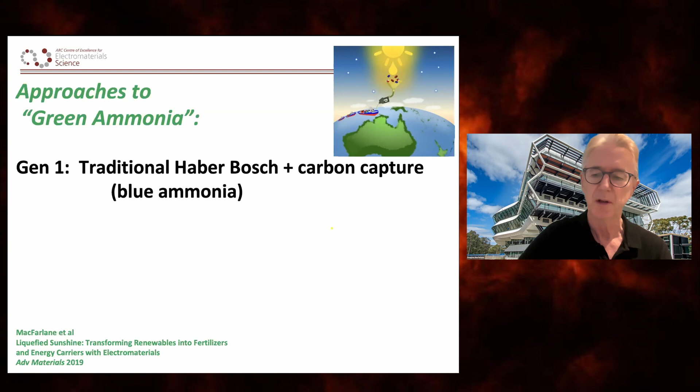Moving on from that, there's the prospect here we can use green hydrogen. If we have green hydrogen from electrolysis or some other process, we can put that into the Haber-Bosch process and generate ammonia. And then to put ammonia into some context as a liquid, as a fuel, let me tell you that it can be liquefied at 12 bar of pressure at 30 degrees C. So that's the kind of pressures and temperatures for LPG. So think of that kind of engineering, nothing terribly complex there.

And as that liquid form, it has an energy density of about half the megajoules per kilogram of gasoline. Okay, so it's not going to ever be a long-haul jet fuel because it's just not energy dense enough, but it in fact is being considered as a short-haul jet fuel. So it's energy dense enough to be a sensible fuel in its own right.

However, before the world got to that point, I've just given you the most up-to-date 2022 thinking there, but before we got there, there is clearly a role for ammonia as a hydrogen carrier. In other words, as I've just talked about, we can make ammonia from green hydrogen. Shipping of ammonia, this is why it became the focus of attention. Shipping and pipelining of ammonia is routine. There are several technologies around now to turn ammonia back into hydrogen, or crack it, as we say. And then, of course, the hydrogen is available.

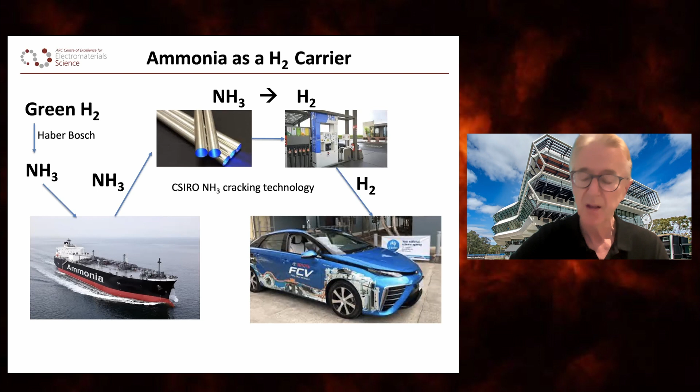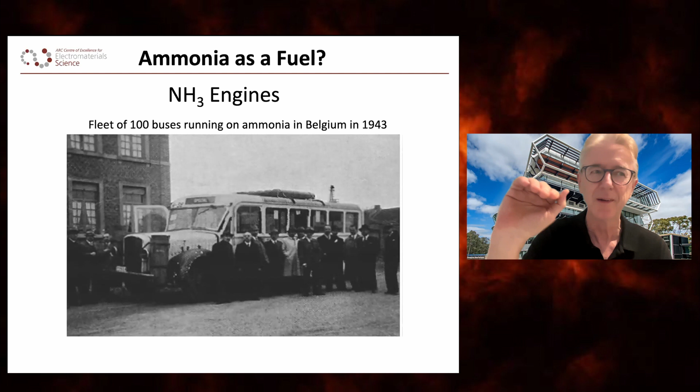However, that idea stimulated quite a lot of further discussion, and many of us were reminded that, in fact, not so very long ago, ammonia has been used as a fuel in ordinary engines. Think of ordinary diesel-type engines. As far back as Belgium in the Second World War, there was a fleet of buses running on ammonia, and you can see in this picture the cylinders of ammonia sitting on top of the bus. Okay, so ammonia used directly, no hydrogen in the rest of my story. Apologies to all the hydrogen people here. Ammonia directly as a fuel.

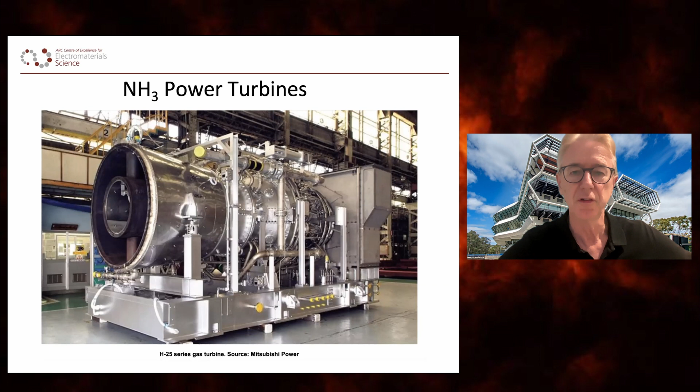Right up to date, here's an ammonia power turbine that is very similar to a natural gas turbine, tweaked, if you like, tuned to run on ammonia. That's not a major refit of that turbine. And this whole situation was considerably propelled by the International Maritime Organization mandating that the commercial shipping of the world should aim to be effectively carbon neutral by 2050.

And as the shipping companies and the ship builders of the world began to look around for what fuel was going to replace bunker fuel, the answer, really the only answer that was viable, was ammonia. And that has largely taken root as the main way forward for international shipping. And that is a huge amount of energy required for shipping, especially by 2050. So that's a quick little summary of how that's developing as an end of supply chain utilization of ammonia that might have started with green hydrogen as the thing stimulating the production of the ammonia.

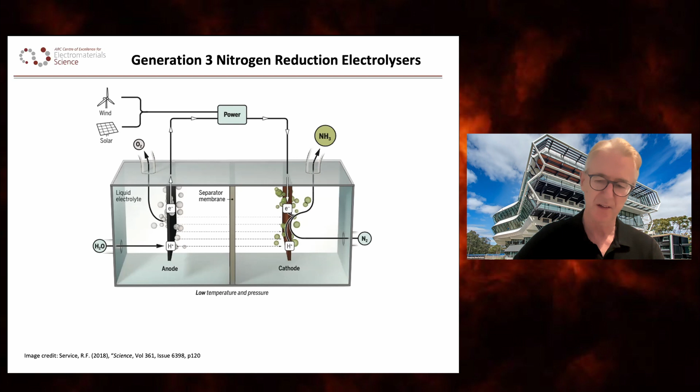But I want to then go on tonight and talk about, again, apologies to the hydrogen people here, can we effectively skip the hydrogen and go direct to ammonia from nitrogen? And the electrolysis approach to answering that question is relatively similar to the electrolysis that produces hydrogen. So to the extent that we're talking of electrolysis-type hydrogen, it can, in concept, be turned over into an ammonia producing process. Nitrogen being delivered into the cathode where reduction takes place. And instead of making hydrogen, hopefully, we will make ammonia. That's the goal. That's the concept here. And in fact, thermodynamically, this is quite sensible.

Chemists amongst us here, some people might be quite surprised at this. I'll have to say I was when I first came across this, that in fact, despite the tremendous stability that we all know of the nitrogen molecule, reducing it to ammonia is actually easier thermodynamically than reducing protons to hydrogen. So 0.3 volts easier is what that slide is telling us.

However, the key point here is that we need to be keeping an eye on the hydrogen reaction, because we don't really want a mixture of hydrogen and ammonia, and those two numbers are rather close. And in fact, there's a problem here, because nitrogen is not very soluble in most solvents. And if we're thinking about carrying out our electrolysis in water to make ammonia, then we're always going to have a problem with the reduction of water itself, because there's so much of it, and that makes hydrogen. So hydrogen, in fact, is a major challenge in this concept.

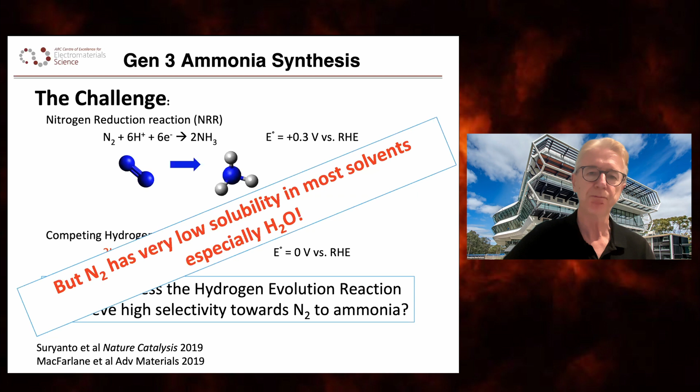So I could talk for quite a long time about how that challenge has played out in the world, and it's not a pretty story. So I'm going to just leap to the last couple of years and say that there is an approach to allow us to avoid this hydrogen problem largely, which is to switch to non-aqueous solvents. And in this case, we're dealing with ether type solvents or carbonate type solvents that are similar to what's used in a lithium battery. And in fact, this approach that we call lithium mediated has got many elements in common with the lithium battery. So lithium battery people would recognize some of the story here.

And we hypothesized that this rather complicated looking bit of phosphonium chemistry, but it's actually quite well known. This is an industrial chemical in the surfactants business, so made in large quantities, actually does this job rather well. And I won't dwell on the chemistry here, but let's just say as a component in this story, this is executing this black cycle in the cell that effectively brings in nitrogen and pushes out ammonia in this electrolysis cell.

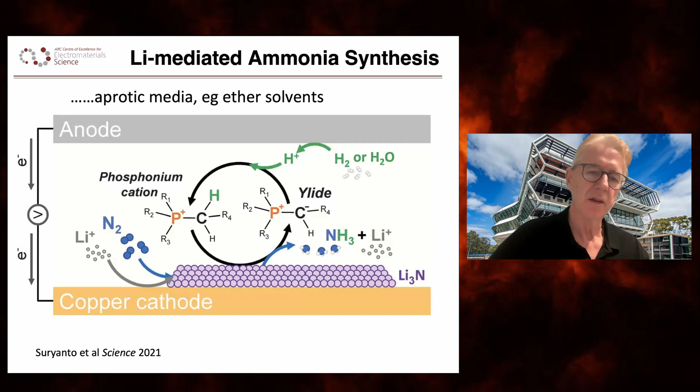And this is effectively the selectivity of the process towards making ammonia and not anything else, including hydrogen, right? So we are achieving that goal that I set for ourselves a few slides ago of making ammonia efficiently with nothing else. If anything else is happening, this is usually bad. So this has always been a high priority milestone in this field.

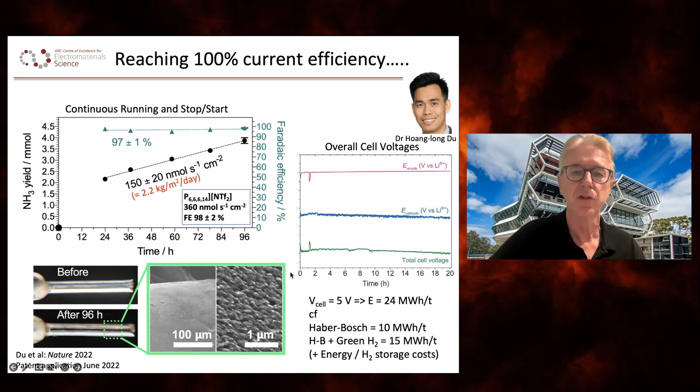And I won't dwell on the energy numbers there, but I can talk more about that if somebody would like to know, because I will say there are challenges there. But this did springboard us towards setting up a spin-out company.

This is called Jupiter Ionics, and if anybody wonders what is the role of Jupiter in this, it is that for the astronomers and Star Trek people amongst us, Jupiter has an atmosphere that is almost entirely ammonia. So there's the link. And our goal there is to scale up from that Mark III iPhone-sized cell that you see in the top left, through the middle one we call the fridge, and then the shipping container.

And the shipping container is the sort of quantity that some of the very big farms in Australia would like to have to make fertilizer on site. One of those is a big farm type productivity of ammonia.

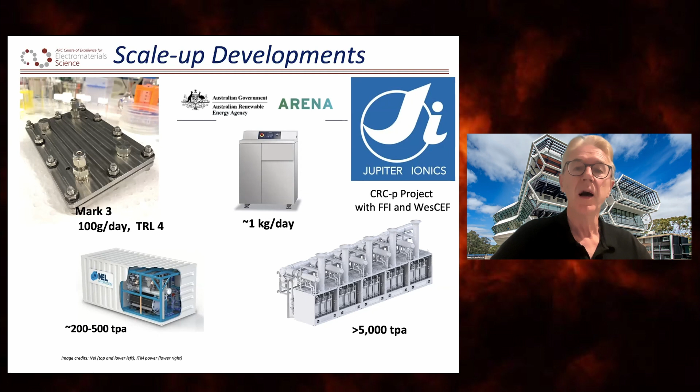And then to scale that up into the gigawatt realm, of course, the aluminium industry teaches us how to do that with electrochemistry, which is rather than just a bigger and bigger cell, we make just lots of them, what is otherwise called the pot line. So we would have an ammonia pot line, which could produce more than 5,000 tons of ammonia per annum.

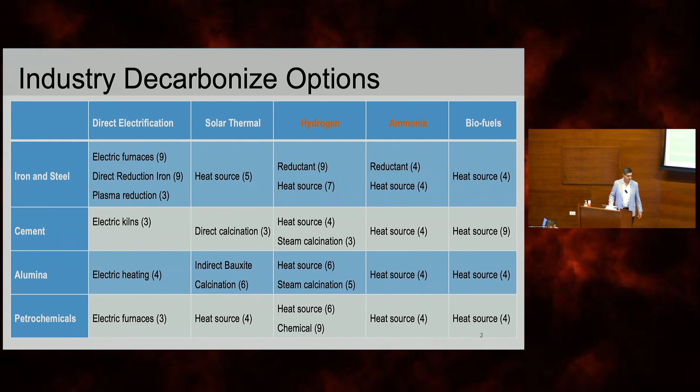So in there, you'd see that hydrogen can be used both as a heat source and as a reductant. So either as a chemical or as a source of energy, in almost each one of these applications. And the last one is biofuels, and the issue with biofuels always will be scale and seasonal variability.

I promised to show you why iron and steel, cement, and petrochemicals are important. If I list here the countries and their emissions for 2020 in terms of CO2, you could see if iron and steel was a country, it'd be number 3 in the world. Cement would be number 4, and petrochemicals would be somewhere between 4 and 5. Now, of course, some of the emissions of these countries are dependent on iron ore and cement and so on. It's included within.

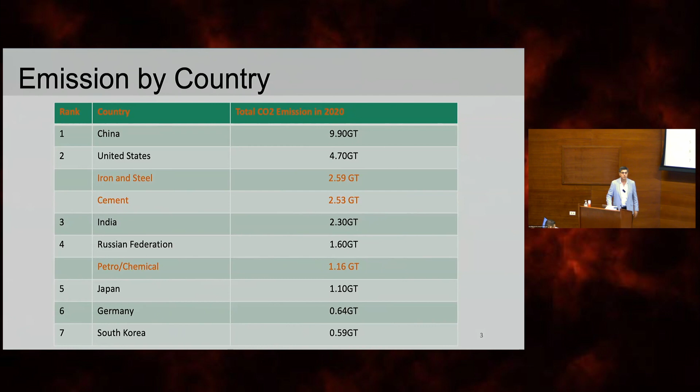But what I'm trying to highlight here is that these are industries or sectors that substantially produce CO2, and hence they are important to be considered separately as such. So hydrogen is versatile, and this is why it's actually really important.

You could either use it for power and heat generation, and you could see here some of the options how you could do that. You could use it as an industry feedstock or as a chemical, basically, as ammonia production, steel production, synthesis gas, hydrocracking, hydrogenation, and so on, and/or for transport. You could see in there that you could use it for fuel cells, for example, forklifts.

It's becoming quite common actually to use it indoors because it does not emit any harmful gases and it's only steam or water. Hydrogen-powered vehicles, hydrogen-powered trains. I'm not sure about aircraft, but ships also. But of course, we could always say hydrogen and its derivatives as well. But you could see that you could have one fuel that could do lots of things for you.

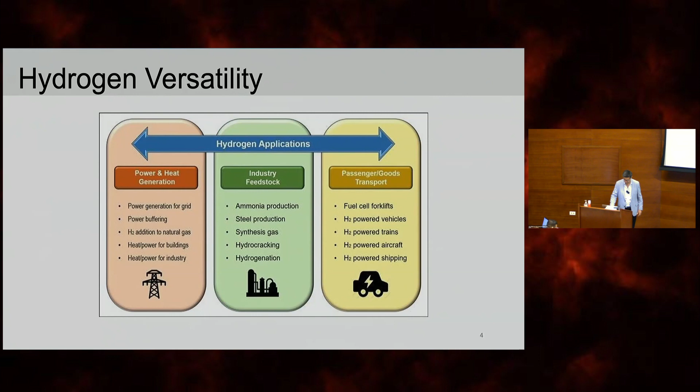Here's how hydrogen is being consumed these days. You could see that 25% of it is going into petroleum refining, around 10% goes into methanol production, around 55% into ammonia production, and out of this, a majority of it comes from fossil fuel sources. 90+% comes from natural gas.

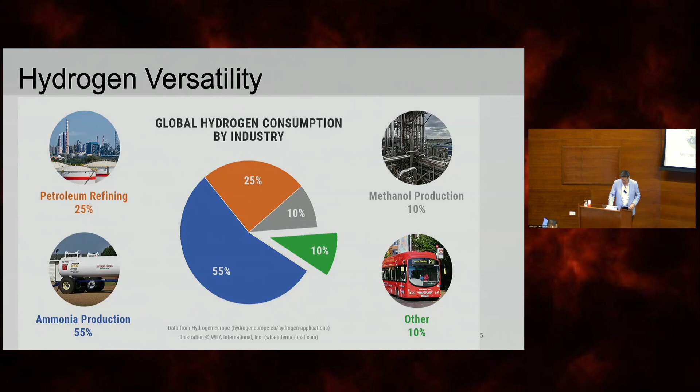So you take natural gas, you're reforming it to hydrogen, but basically, if you don't capture the CO2, you have carbon emission, and the rest is going to transport and other applications. So this is what's happening today. But if we were to actually use more of the hydrogen for decarbonization, some of these numbers are going to change substantially as well.

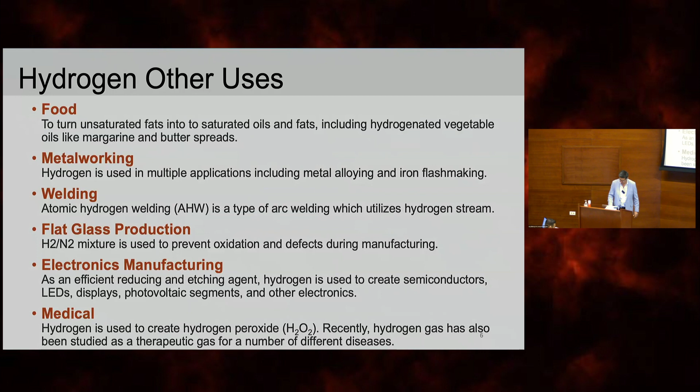So these are some other uses. It's not restricted to what I showed you in there. You could use it in food, metalworking, welding, flat glass production, electronics manufacturing, or medical applications. And here you could read it for yourself, but there's a lot of applications for hydrogen beyond just the way we're seeing it as fuel cells, for example. Hydrogen is actually quite a versatile chemical that can be used in lots of applications.

So let me start with options in using hydrogen for decarbonization. The first and the easiest way is hydrogen blending. And what's hydrogen blending? Simply you say, I have a system operating on natural gas. I simply want to add hydrogen to the natural gas. And so this way, it's what's called fuel displacement. In other words, instead of burning this amount of this fossil fuel, I'm burning less of that fossil fuel.

The good thing about that, as the advantages listed here, is it basically gives you fuel flexibility. When it's available, you could put it in. When it's not, it's not. And let's face it, in the transition for the next 10, 20 or more years, there will be ups and downs. And there will also be fluctuation in the market. One day you have cheap hydrogen or expensive natural gas and so on. So having an option actually will be good.

At low concentration, no major changes are required. Simply you blend it in, and I'll show you a map showing what the percentage is. It allows for intermittent supply, use when available, basically. It increases familiarity in using and handling hydrogen. If eventually hydrogen is going to be the fuel of choice, it'll be good to start learning how to use it in our systems. Then eventually, when we switch to full 100% hydrogen, we're already familiar with it.

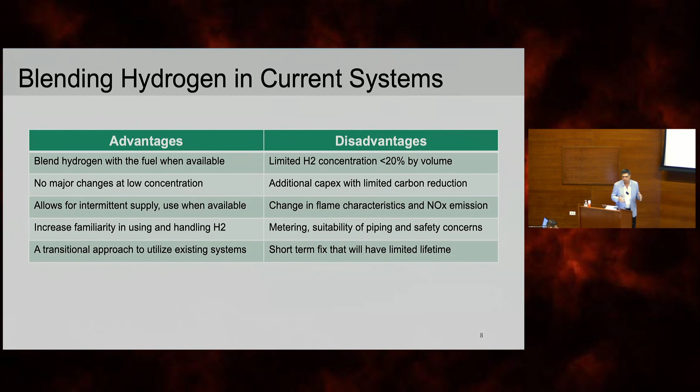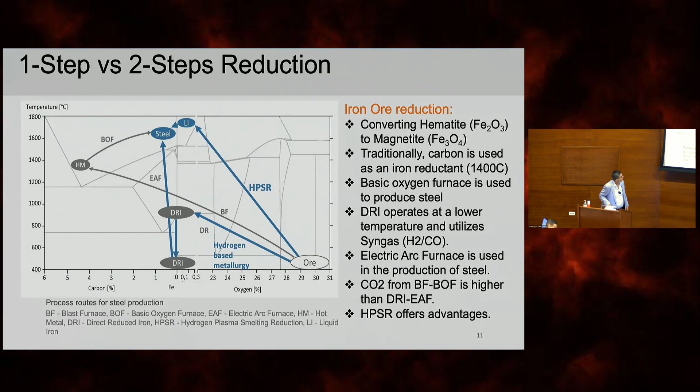So as I said, hydrogen plasma reduction is basically one step. For this single-step process, we have a project here. Jordan is one of the students, working with Professor Deanna Lacoste as well, looking at how we can use plasma and hydrogen to reduce the iron to what we want it to be. The advantages are no need for pre-processing, sintering, or pelletizing of the iron ore. The energy reduction is 55%. And this is the key, by the way: if we're smart enough, decarbonization can be cost neutral. The saving in energy can pay for the decarbonization. The other major advantage is that you could use low-grade ore.

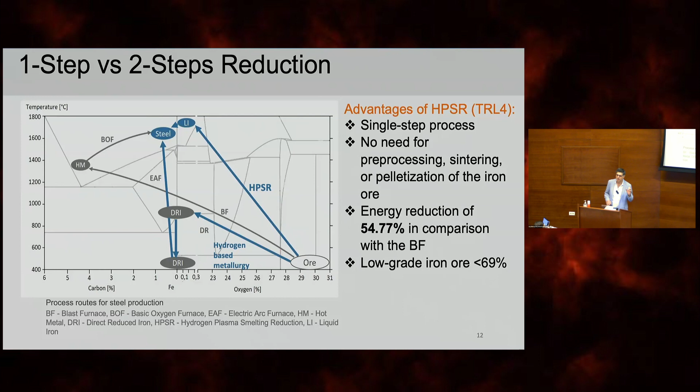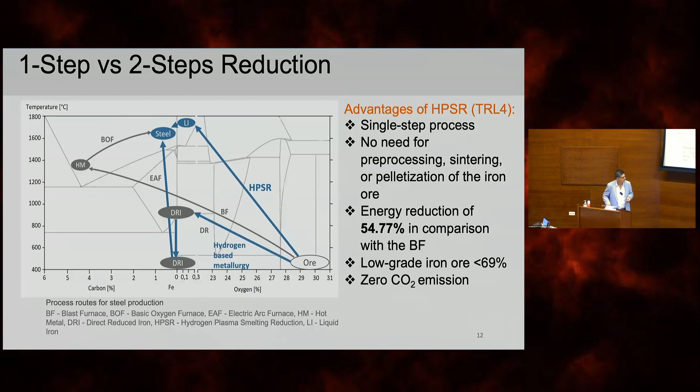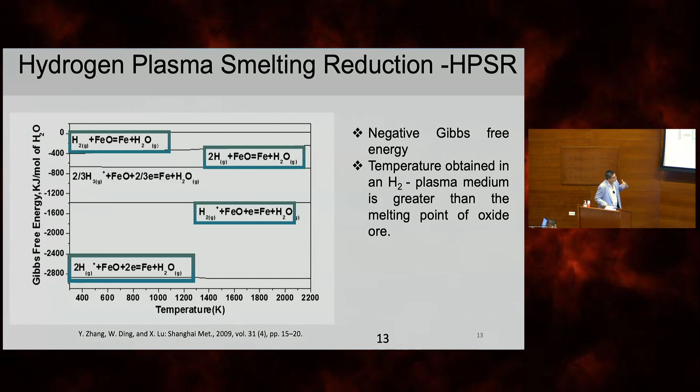DRI would only work when the concentration of iron in the ore is 69% and above. With plasma reduction, it can be lower than that. And of course, you're not emitting any CO2 because you're using hydrogen in the process. There are advantages in terms of the energy level required when you go into the plasma, and this is where your savings come from. You have negative Gibbs free energy, and the temperature will also help with the melting point.

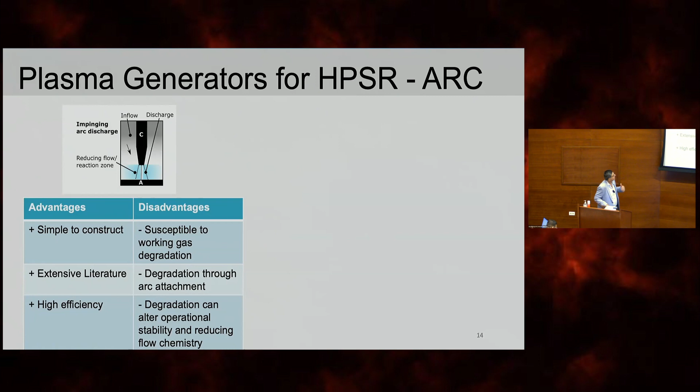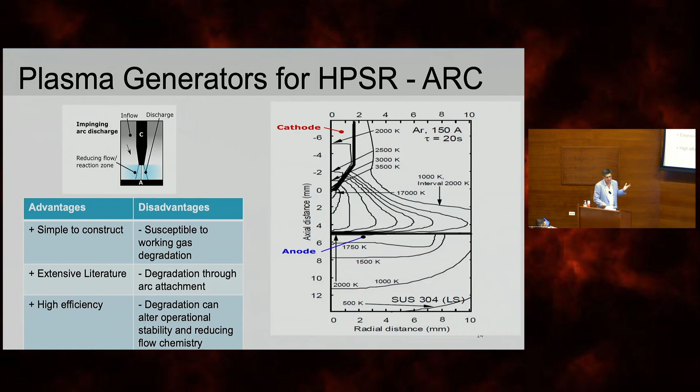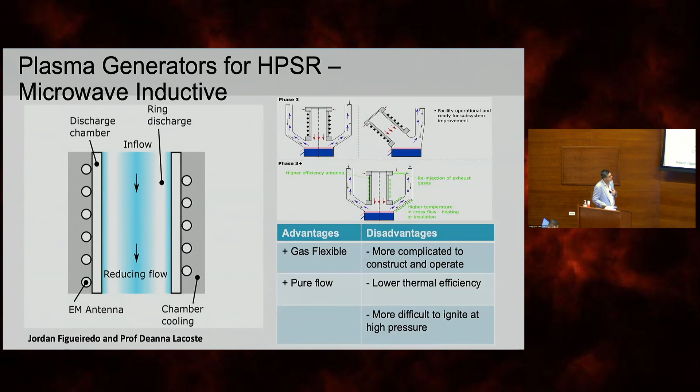Options in terms of advantage currently: if you use an arc-type system to generate the discharge for the plasma, then some of it is going to be consumed, and the scaling is a major issue. I won't dwell on that, just to highlight that this is a technology that we're looking at developing. We're not the first people to work on this, by the way, but we have new ideas of how to basically take this approach, get rid of the anode, and use inductive plasma, or some other approaches that are currently being protected under IP, to be able then to use hydrogen for the reduction.

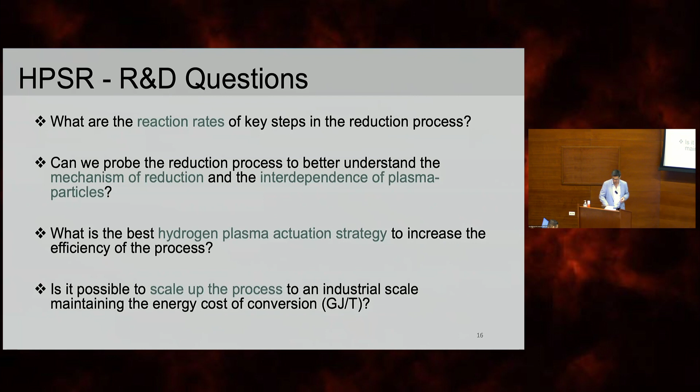So what needs to be done is we need to understand the reaction rates and key steps for the reduction process. We need to better understand the mechanism of reduction and the interdependency of the plasma and particles. One thing is to create a plasma. Another, if you have in-flight particles inside, then that's another issue. Actuation strategy: hydrogen is not the easiest gas to create plasma from, so we need to see how we could do that effectively or efficiently, and the scale-up process is one of the major impediments that we'd like to tackle.

So the DRI process with EAF using hydrogen is basically you start with iron ore, you pelletize it. Remember, we talked about the two-step process, and then in here you use hydrogen, and the product is going to be water. Remember, we're removing oxygen from the ore, and that will create basically water. And then eventually, melting iron will be in an electric arc furnace.

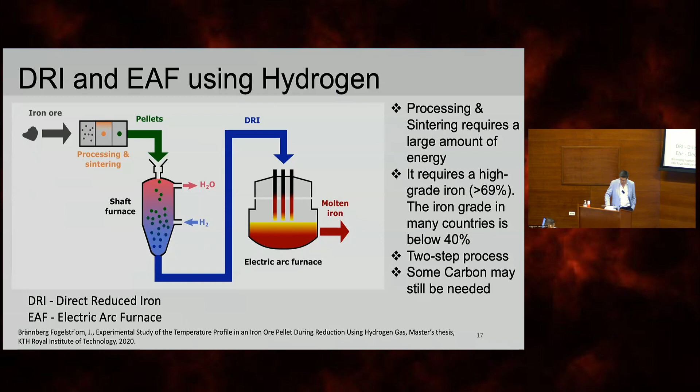And the thing is, this requires a lot, because sintering requires a large amount of energy. It requires high-grade iron ore, as I mentioned before. So, for example, here in Saudi Arabia, the best ore available has 43% iron in it. It's a two-step process, and some carbon may still be used. So they're even talking about adding some CO into the system because they're not getting full conversions.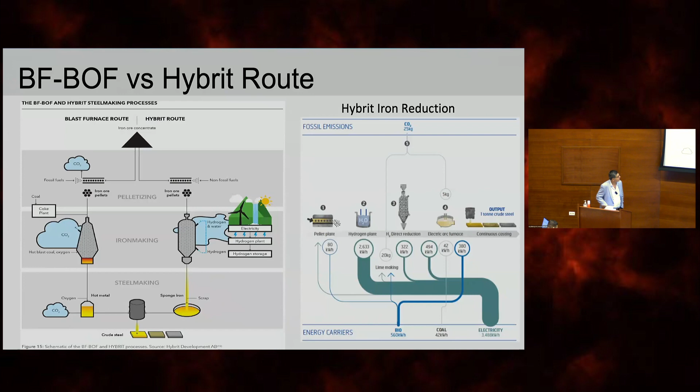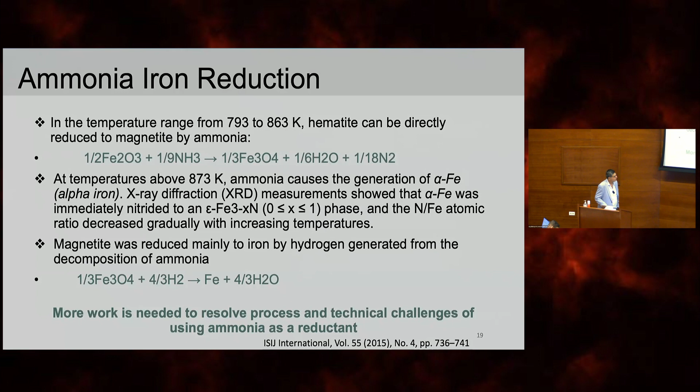And here's another thing. So one thing is creating the iron, another one is the steel, and in there you need a lot of heat to reheat. So we came up with the idea of using hydrogen to replace fossil-based fuels. But the thing is, in most of these heating furnaces, radiation is used. Now, as compared to fossil-based fuels, hydrogen does not emit a lot of radiation. So we came up with an approach of doping the hydrogen flame with 1, 3 or 5% of aromatic hydrocarbon. This will create soot within the flame envelope. This soot will be burned before it leaves, but it does actually radiate a lot of its energy out.

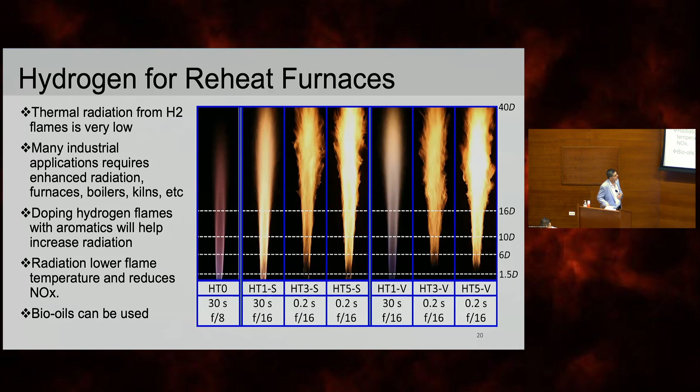So we could then use hydrogen for reheat furnaces. So it's a retrofitting approach, but still it's using hydrogen. And because you're lowering the flame temperature, you're likely to lower NOx as well. And you could also use bio-oil-derived aromatics instead of fossil-based ones, and then you still have a CO2-neutral approach.

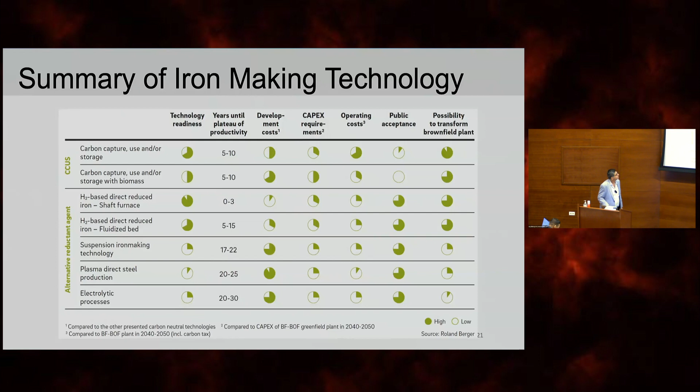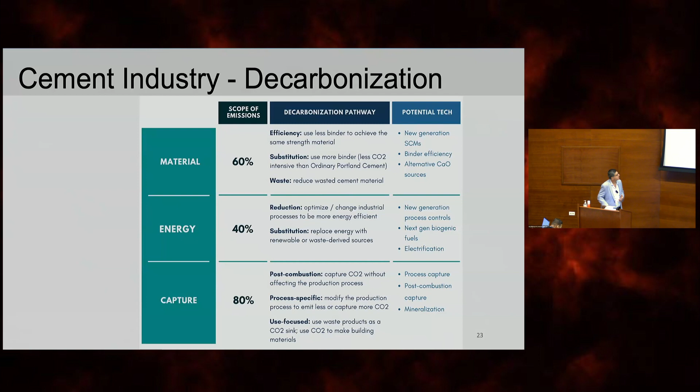Cement and lime. So these three ways we could do it. 60% of the CO2 comes from the material. You take limestone and you convert it into calcium oxide, and by this you release CO2. Then the other 40% is basically from energy. You need all of this energy to actually do the reduction of the calcination, and then the capture up to 80%. You could do it using really expensive sort of processes.

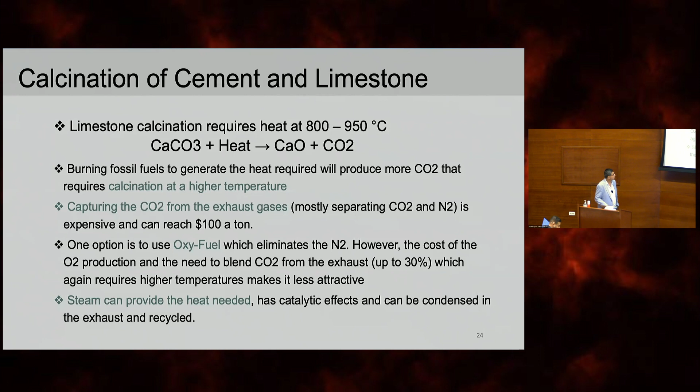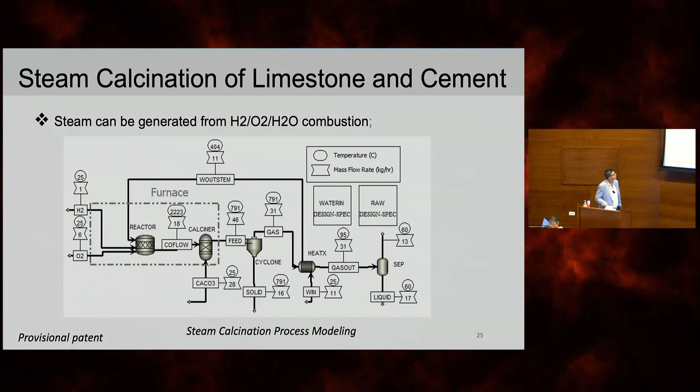Here's a process that we patented, basically doing exactly that, a steam calcination process. And basically what I want to do is to take a liter of water. I want to put it through an electrolyzer. I want to crack some of it, end up with hydrogen, oxygen, and the rest of the water. I want to react it back again and create the steam at the temperature required. Of course, it's easier said than done, but the idea here is that renewable energy will be used to create what I call green steam. So using it requires lower temperature and hence reduces energy per ton.

Hydrogen and oxygen can be produced by electrolysis, as I've said. Condensing the steam will then leave a pure stream of CO2. So we've done some Aspen Plus modeling. More than 90% of the water is recycled, and that's important, of course, and 94% of the CO2 can be captured, which is much higher than I showed you before in the previous processes. The technology is financially competitive with natural gas plus capture when hydrogen cost reaches around $2 a kilogram. And the aim is to get to $1 a kilogram.

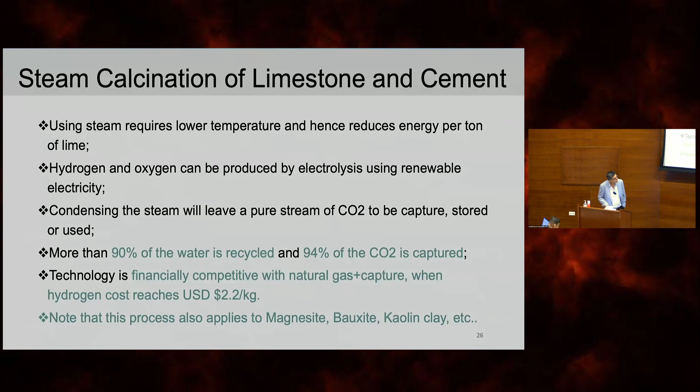Note that this process also applies to magnesite, bauxite, kaolin, clay, and so on, so it can be applied to other ores. I won't dwell too much here, but these are some of the calculations we did, depending on the price of natural gas, where it would be competitive and so on.

The good thing about renewables, by the way, is that you're not hostage to the cost of fuel. The players in the market are going to change, where you do a lot of capex investment from the start, knowing you're going to get returns for the next 25, 30 years, and then you know exactly how much hydrogen is going to cost you. So in other words, you are a little bit in control in terms of the cost as compared to the current system. If anybody monitors natural gas prices, it's a seesaw basically, and the difference can be up to a really big number.

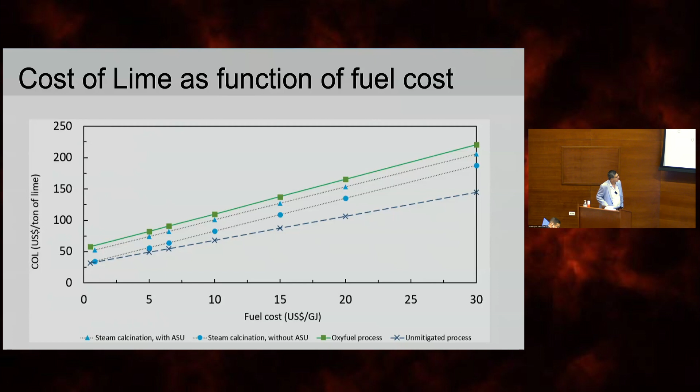And again, in here we're looking at the cost of lime. So limestone is the feed. You could also use lime itself, not necessarily cement. And you could see in here if you do steam calcination with an air separation unit, if you do it without an air separation unit, the oxy-fuel process, and so on. So comparing what the cost would be, it doesn't look like it's hugely expensive as certain percentages increase, but that depends totally on the fuel cost at the end.

Finally, power generation. So here are some of the options. Industry requires a lot of power. Some of it they generate themselves. Gas turbines, diesel engines, fuel cells, boilers, and then hybrids with renewables. I listed the TRL and what are the issues.

So the gas turbines are relatively efficient under hydrogen, could stretch the boundaries quite a bit. NOx emission could be an issue. Diesel engines, I'm not sure about NOx emissions, but can be. Of course, it's retrofitable, and that's important. Fuel cells, there's an issue with durability. Boilers, currently they're using basically ammonia with coal. And ammonia, of course, can be produced from hydrogen.

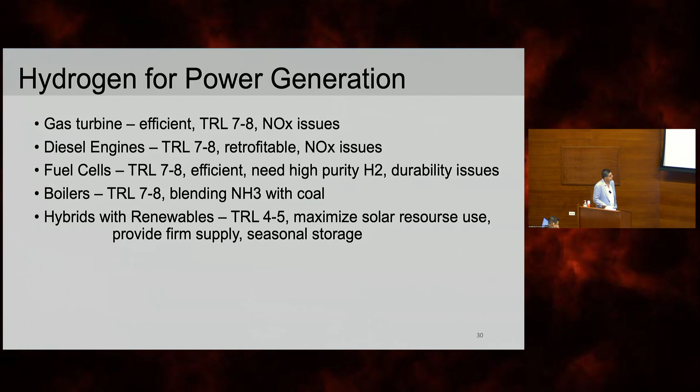And this hybrid idea is that you could use hydrogen as a long-term storage or seasonal storage, and to give you a firm supply. So I have hydrogen, I could use it whenever I need to, and then maximize the use of the solar resource. So this is still low TRL. I'll show you some work that we've done.

Basically, we took a cavity receiver, and then we installed burners inside, and then we ran this using a variety of fuel. And if you could see on the figure in there, we ran a syngas, H2/CO, we ran hydrogen itself, and then we looked at the efficiency, the maximum temperature, and basically it works quite well. So efficient operation on 3 modes, and 3 modes here are solar only, combustion only, or mixed mode.

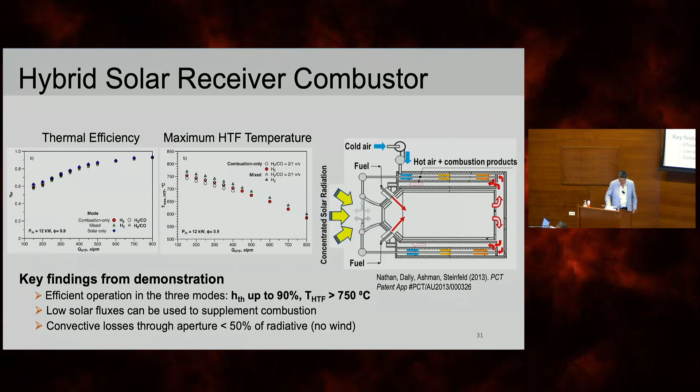And you could see here up to 90% efficiency and more than 750 degrees C. Lower solar fluxes can be used to supplement combustion. And then convective losses through the aperture are less than 50% if there's no wind. So we actually can have some gains in there.

Here's basically a summary of what future R&D for hydrogen utilization in industry is required. That's something I came up with for steam generation. I listed from, say, today up to 2035, what will be required, where R&D is green, and then demonstrations, and eventually sort of deployment, if you want. And then in there, I talked about blending. I talked about hydrogen, oxygen, water, steam generation, and so on.

How modifying DRI can help by adding more hydrogen to it, or later on at much larger scale, further on, what you could do with plasma as well. The kiln, so lime and cement with this technology of steam calcination, and with heating furnaces, what we could do as well.

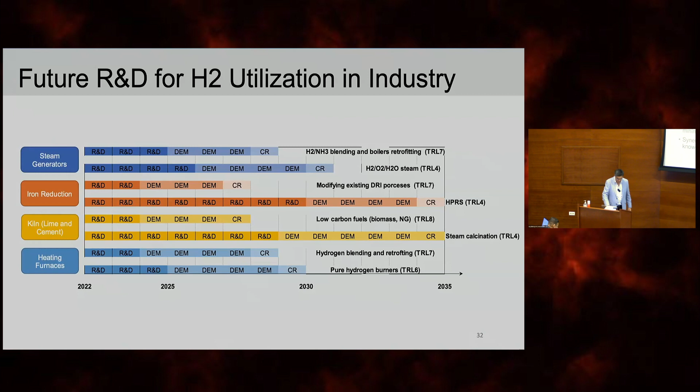And here's the conclusions. Technology is not a barrier to utilize hydrogen in industry. Blending hydrogen and ammonia with fossil fuel is a good transitional step. Scaling, piloting, and deployment are needed in the next decade. Further research and development is needed to exploit promising technologies like the one I showed you. Fuel flexibility and blending is the most plausible option in the short term. That's sort of repeating some of what I said before.

Hydrogen production for industry and at scale would need to be on site to minimize cost and transport and storage, and synergy and niche applications. There's a lot of people wanting green metals, so it's essential to develop know-how, expertise, and de-risk large-scale adoption.

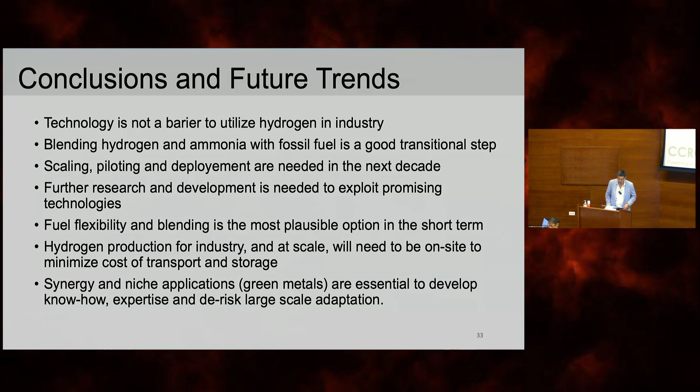So the final speaker is Dr. Taewon Lee. Dr. Lee has a PhD in electrochemical engineering from Columbia University and more than 30 years of experience in the fuel cell industry in both the United States and Korea. In the US, at FuelCell Energy, he participated in the development of molten carbonate fuel cells. And in Korea, he was the head of the Center for Chemical Engineering for Doosan Heavy Industries and also the CTO for POSCO Energy.

In 2018, Dr. Lee founded Fuel Cell Innovations, which is a joint venture between Saudi Arabia and Korea, aiming to develop SOFC, solid oxide fuel cell technology, and electrolyzer technology for these countries. So we're very excited to see what Dr. Lee has planned with his Fuel Cell Innovations.

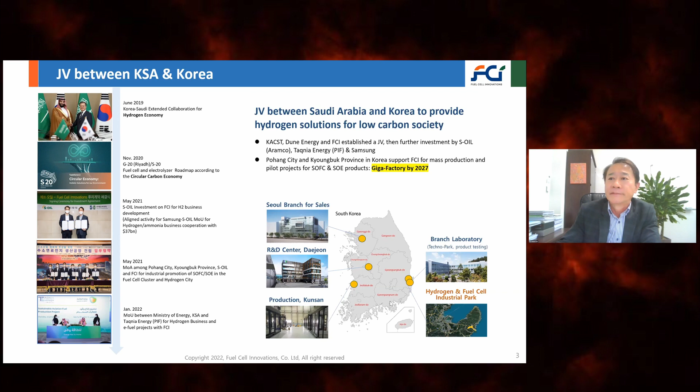Our technology platform. I'm from industry, and I'm really focusing on the products and the business model, so how our technology can be converted to certain areas, especially matching the energy structure of the region. We have developed MCFC for more than 20 years, and our SOFC for about 15 years. Now those technologies are converted to FCI, and for the SOFC, we think that the SOFC and the SOE are the same classification because we use the same common stacks and cells. And for the MCFC, we are moving to the second generation of MCFC.

These are our technology platform, and we are also able to integrate ESS, which is lithium iron phosphate battery, and the PEMFC, that's polymer electrolyte membrane fuel cells. Those are important because we aim to make hybrid systems with these two products. So we have some SOFC products here and also MCFC.

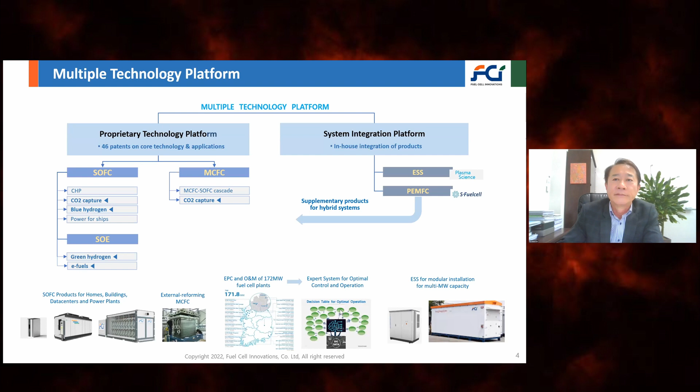Let me start with the two things that I want to focus on. MENA countries, as everybody knows, have a strong dependence on fossil fuel, which makes it necessary to capture the carbon to make clean energy in the near future. Another aspect is that the cost of oil and gas is very cheap. So based on these two,

this is very challenging, actually, to have fuel cells as a good product for the MENA region, and capex is clearly the most important thing that we really need to reduce to the bottom. But one good aspect is that the ratio of LCOE or even LCOH versus gas price is still high in Saudi, the US, the UK and Germany, which means that the margin for the value proposition to sell the products is still green because it's high compared to other countries. But contrarily, in Korea, Japan and China, the value is much lower, which means that a subsidy program is required to promote the industry.

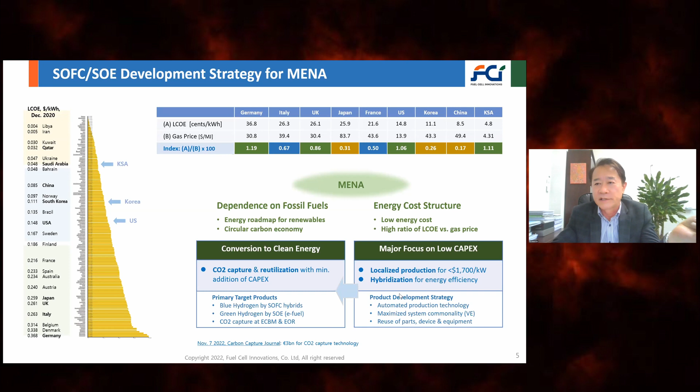So this is the situation, and we focus on three things: carbon capture products, and very low capex, which is only possible by localization of production in Saudi or any region in MENA. And another thing that I really want to focus on in tonight's presentation is hybridization of certain processes. Those are the major focus of today's presentation. Here it is night.

This is the R&D priority in the National Hydrogen Strategy in KSA, the strategic advantage and the criticality for development. Fuel cell and electrolyzer technology can cover a wide variety of very important business models and technologies: SOFC and MCFC for carbon capture or green hydrogen production, ammonia fuel and ammonia-fueled ships as marine fuel, and SOE hybrids for e-fuel and e-chemicals. Those are what we started to develop, and for certain models, we already came up with small or medium scale commercial products.

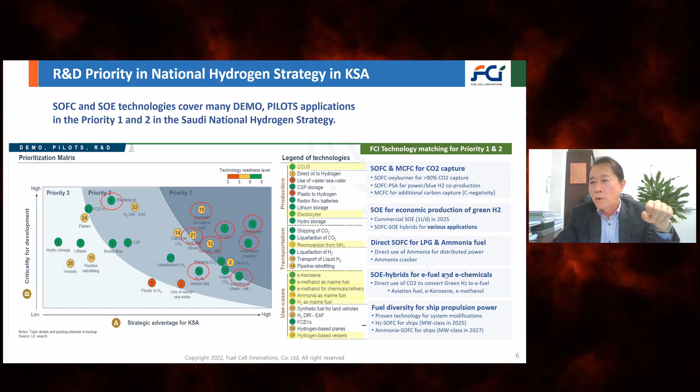As I said before, S-Oil is the largest oil company in Korea, and Aramco also has a value chain for hydrogen and ammonia, and there was an MOU between these two companies, which are our major shareholders. So S-Oil already decided to develop, deploy and promote the fuel cell business in Korea as well as in Asia or other regions.

And this is the way that the SOFC or SOE can be used in the hydrogen and ammonia value chain. It is a wide variety of applications, starting with production and also transportation. Here, I don't mean any compression or phase change of the materials, nothing like this, only ship applications for the transportation of ammonia and hydrogen.

And also the final utilization of the hydrogen and ammonia by fuel cell is very obvious. It is like a power generation and also hydrogen generation.

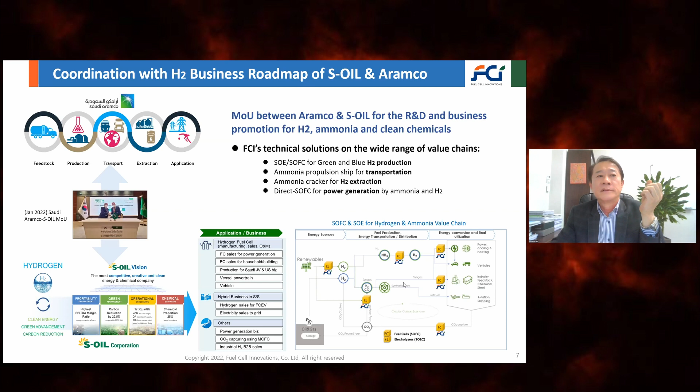Let me go over our proprietary technology quickly. As a spin-off company from POSCO Energy, we transferred the 16 patents on SOFC, and that technology was accumulated for 17 years by spending more than $200 million on R&D. We came up to the 10 kilowatt and 25 kilowatt stacks when I was the CTO of the company. And now we made some advancement of the 10 kilowatt single stack.

For SOFC commercialization, single stack is very important because we connect single stacks in parallel or in series to make the large stack and the large module for SOFC and SOE. We have seen our small scale stacks started to last more than 30,000 hours, and also we made some advancements on the coatings and other applications of the new technologies, and we are aiming for 5 to 7 years of durability.

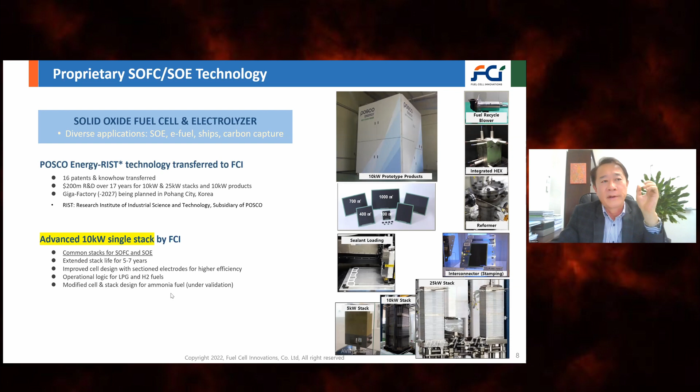Molten carbonate fuel cell technology. There is only one company who's making the products and doing the business in the world, that is FuelCell Energy in the United States, where I worked several years, a long time ago. Also, the molten carbonate fuel cell technology has been developed in Korea from 1996. There are two different ways of commercialization. Internal reforming MCFC was developed by the United States, and external reforming MCFC was developed by Korea and Japan. We have both technologies in-house.

Years ago, only internal reforming molten carbonate fuel cell was valuable for commercialized products, because in those days, the need for hydrogen fuel or ammonia fuel was not that important. But nowadays, direct ammonia fuel for fuel cells, or hydrogen, or even LPG fuel, these are only possible for the internal, external reforming molten carbonate fuel cell. And we know how to make the fusion of these internal and external reforming fuel cells. And we are also very interested in the mixed fuel, blended fuel with hydrogen and also ammonia.

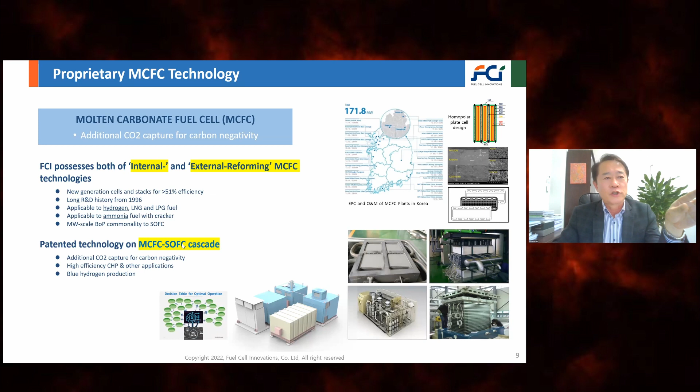These small SOFC products for homes are on sale, and also this 45 kilowatt system for data centers and buildings is also on sale. And this is going to be in field operation early next year, and will be on the market next year. And this is the product for the Saudi market, the MENA market. This one can use LPG and also LNG and ammonia mix. For now, I can say only 27% of ammonia will be okay with hydrogen or with LPG.

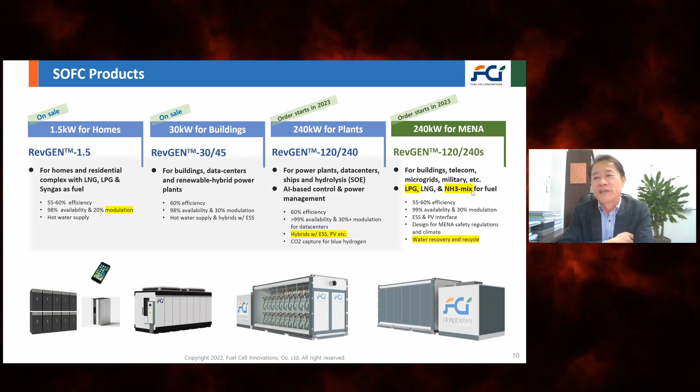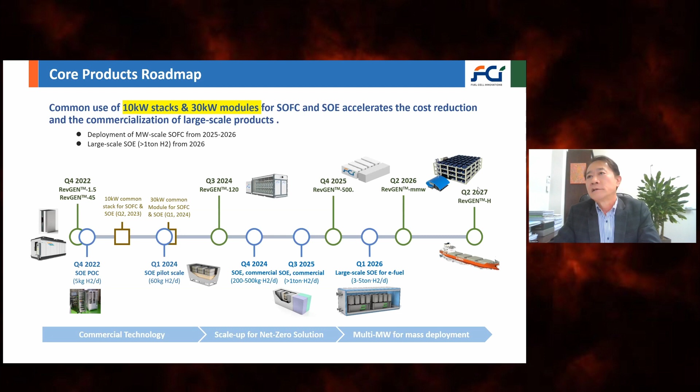And the SOFC is on track to go for the megawatt scale, because Korea is a very unique country where the government provides a subsidy for power generation by fuel cells, any types of fuel cells over 100 kilowatts. And the subsidy lasts for 20 years, so there's a very good business model in Korea.

SOE commercialization, as I already said, we focus on 3 business models. E-fuel for MENA countries, nuclear power plant linked SOE. We can have plenty of high temperature steam from the nuclear power plant, because nuclear power plants were designed with 7% surplus steam generation, and we can use them for the production of hydrogen. And also SOFC and SOE hybrid system for CO2 capture, which I will introduce.

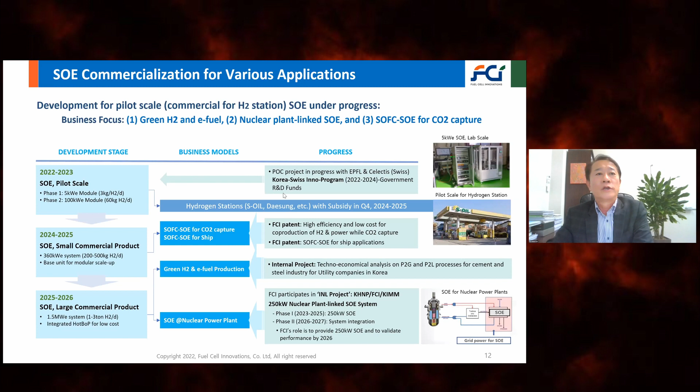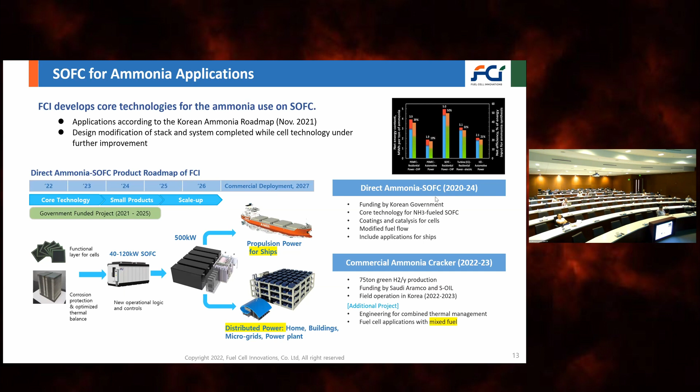But before that, ammonia application, we focus on direct ammonia. Ammonia is a direct fuel, so we don't really need to crack the ammonia to hydrogen, and then we can have much higher efficiency for power generation. There are still a couple of issues that we need to solve, but for now, the mixed fuel for SOFC is working fine, and we are developing the catalysts and special coating to prevent nitridation and many other corrosive reactions.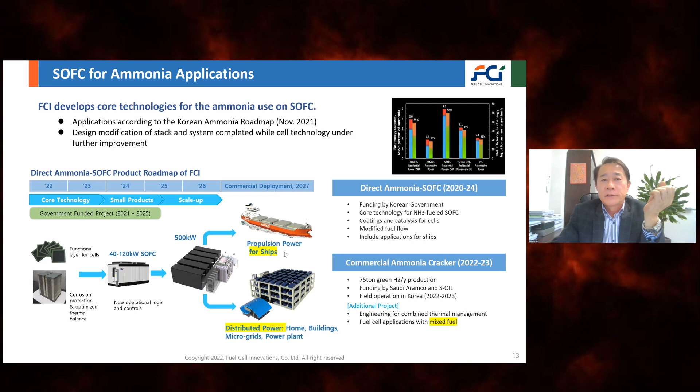So ships, I can explain that later here in the slides. We started a long time ago with the molten carbonate fuel cell for ships. It didn't work very well. We switched in 2020 to use the solid oxide fuel cell, which is much smaller and lighter compared to the molten carbonate fuel cell.

In 2020, and several months ago, we completed the first phase of our R&D, and this 40 kilowatt SOFC is a hybrid system with a gas engine and the ESS system to supply the power for the propulsion of the ship. It was a successful project, and then we are expanding our project to the 500 kilowatt SOFC system.

This will be the commercial product right away, because we can use other power sources for the hybridization, and they will go to the markets. So in 2028, we aim to have 20 megawatt commercial ships apply that.

And here, this ship is being constructed in Korea. Korea is strong in the shipbuilding industry, and this is already designed, and this project will be applied to this ship, and we bring the SOFC to the ship. And the important thing is that the ammonia-fueled SOFC is also a very important topic for the Korean government. So this project will be funded by the Korean government for 5 years.

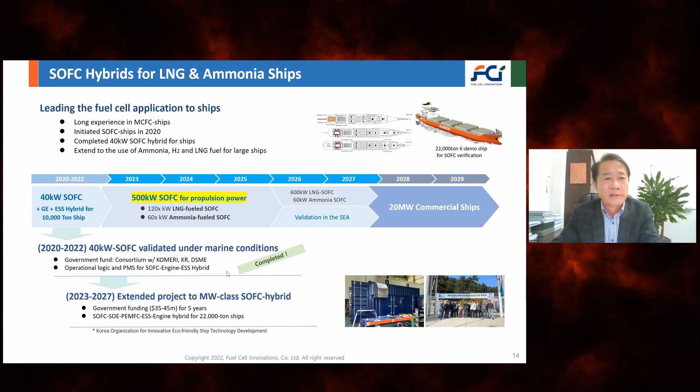This is also what we designed based on our patents. I have 2 cases of the new hybrid processes here. SOFC for power and hydrogen co-production by using PSA and special controls and special catalytic oxidizers, and also we already designed the oxy-combustor that will be used for this process, SOFC and SOE hybrid for power and hydrogen.

These 2, we believe, are very good commercial models for industry, especially for the MENA countries. As we know, if 60% of the CO2 is captured from the fuel, then the hydrogen produced from the process can be identified as blue hydrogen. And here we target higher than 90% capture of the CO2.

And for this one, we aim for 95% or even almost all the CO2 from the fuel, as well as we have a very special patent here. When we use air for the combustion, a huge amount of nitrogen is fed in there, and then the separation of the CO2 is very costly and very difficult.

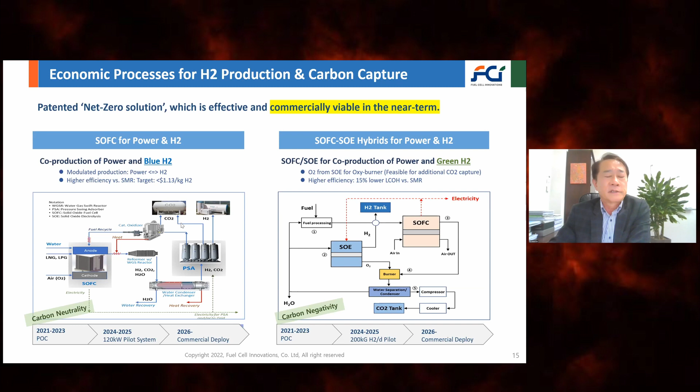I just want to quickly show why this blue hydrogen production process is economic. This is steam methane reforming, which is already commercialized, and large plants are being built in Canada, the United States and also Japan. Simply, we burn LNG to supply heat for the reformer.

In our system, the solid oxide fuel cell, we get co-production of power and hydrogen. Here, we use the reaction heat from the SOFC, which is high enough because the system operates at a temperature higher than 730. So there is enough supply of heat from the reaction, and we don't need combustion here.

So the internal reforming SOFC can be converted into an internal reformer of LNG to produce blue hydrogen. Some of the power can be generated, but most of the fuel can be separated as hydrogen. So we can say it's blue hydrogen, and we can also do modulated operation between power and blue hydrogen. That kind of functionality is very important for industrial applications.

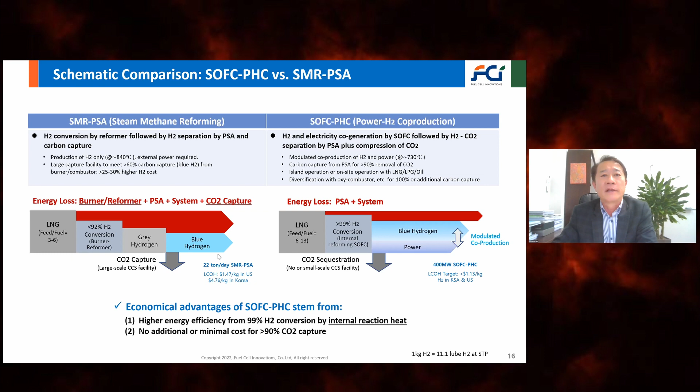So let me summarize: our company is a JV between Saudi and Korea. We are supposed to provide solutions for hydrogen, carbon neutrality and carbon negativity by using fuel cells and electrolyzer technologies. We are actually preparing the mega gigafactory

which is automated production at the gigawatt scale. That means we aim to produce fuel cells below $1,700 per kilowatt, and we have a global R&D consortium. Especially, we have a very strong and active cooperation with the research institute in Sion, Switzerland, and also a couple of universities in the United States.

And we really want to extend our open innovation consortium for R&D to MENA countries as well, so we are open for that. And we have multiple fuel cell technologies, based on the solid oxide fuel cell and the molten carbonate fuel cell. And that's it. This is my contact, and I hope we can take this opportunity to be aligned together for cooperation in R&D and product development.

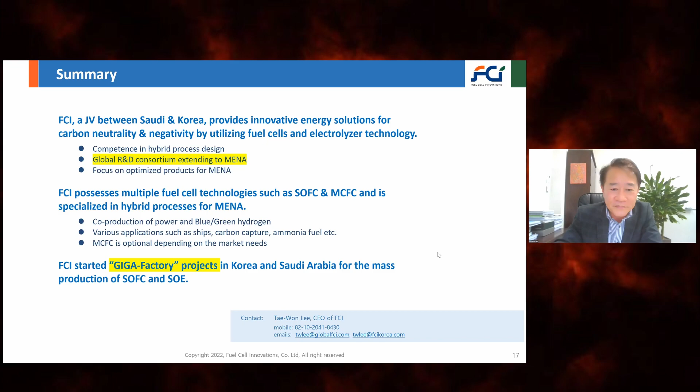Thank you very much. Thank you, Dr. Lee. Okay, we have time now for some discussion or questions. Are there any questions from the audience for any of our speakers? Professor McFarland, Professor Dali, Dr. Lee?

Professor McFarland, thank you for your presentation. I had a question regarding the overall energetics of the process. For your system, I guess you need an ASU to get the pure nitrogen. If you include that and the energy required for the reaction, how does it look overall compared to conventional water electrolysis and ammonia Haber-Bosch?

Good question. There was some data on one of my slides, but I won't try to bring it back up. To give you an overview answer, the lithium mediated process that I described is a bit of a brute force process to break open the nitrogen molecule, so it is quite energy consuming. If I use energy efficiency numbers including an appropriate air separation stage, and I'll come back to the air separation point in a moment,